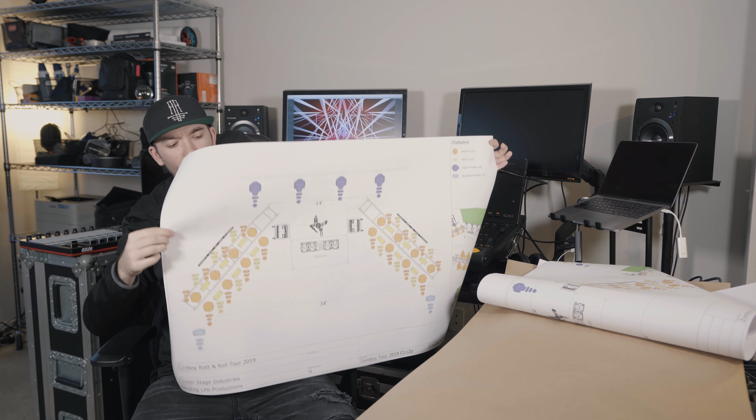Oh, almost forgot. The lamination thing is cool, but there's one other piece I'm forgetting, and that is the big plots. There are 3 of them, and they are top-down patch sheets of our show. Let me make sure I have it oriented correctly here.

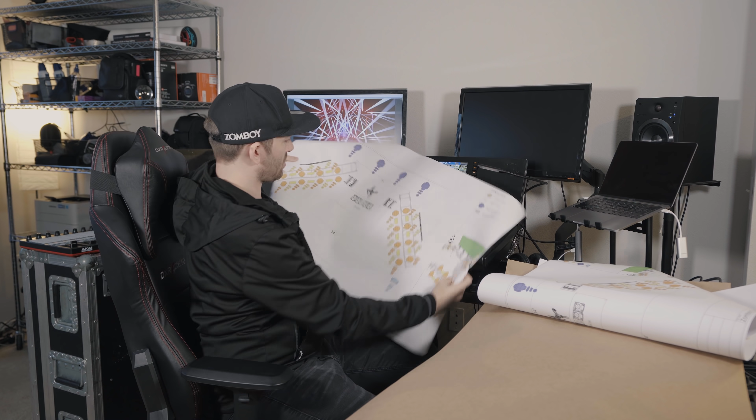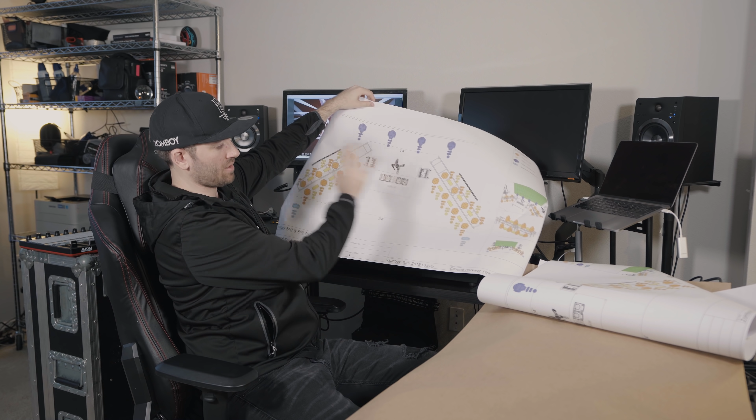There we go. So these are 24-inch tall by 36-inch wide 2D plots, and you'll see some 3D inset views. This is the main 2D part of the plot, top down, and we'll go over all of this on the computer. I'm just showing you the scale of things. In here we have our inset views, 3 of them, to give a 3D representation of what people are to expect when we come to their venue.

These are the big versions. Like I said, we've got 3 of these. The reason I have 3, and they're not laminated, is because we only really need 1, but we're going to be using 1 on our prep day. That is

this Sunday, at Pass Christian. By the time you see this, we'll already have used 1 of these for prep. Then we take all of them on the road, and I'll probably keep 2 in my work box in case we lose the main one—they're just really for backup. I don't laminate them because laminating the big plots makes it hard to handle. It's easier to just roll them up and keep them in a rubber band.

Other than that, this is the first time I've done laminated plots and patch sheets. So this is also the show that's on the screen back here. This plot is only for the ground package. But later in this video, I'm going to go over what this plot looks like for the stage I designed, and I'm going to be running the show in Tacoma coming up next weekend.

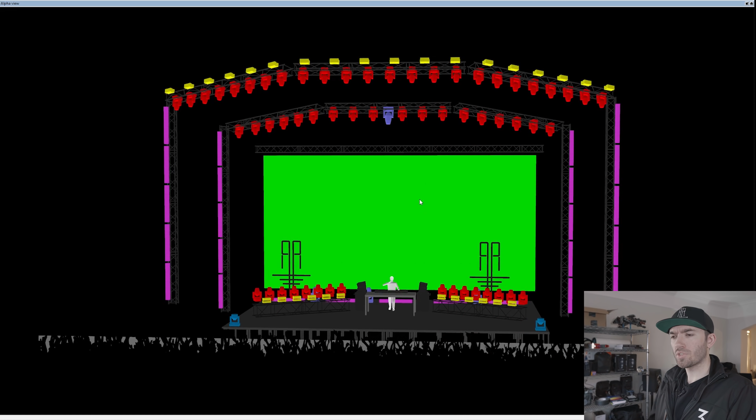So let's hop over to the computer and we'll take a closer look at one of these plots. We're going to pop over into Capture, that is the design software that I used for this particular show. And we can see I have a full screen visualization. It's not really a visualization, it's like a 3D model of what the stage looks like.

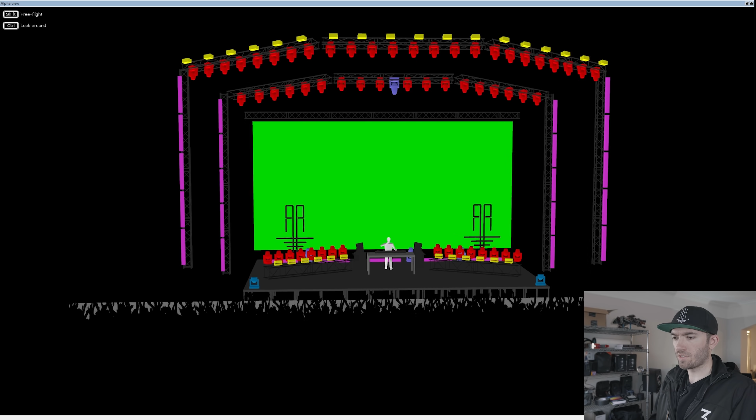We can make it a visualization by changing the view mode or view type. You can see all the beams of light and everything. But we're more concerned with this view right here because this is showing all the different elements and how they interact with each other in 3D space. You can see everything is layered, everything has its own separate little piece of the world that it exists in. But there are a couple problems with this.

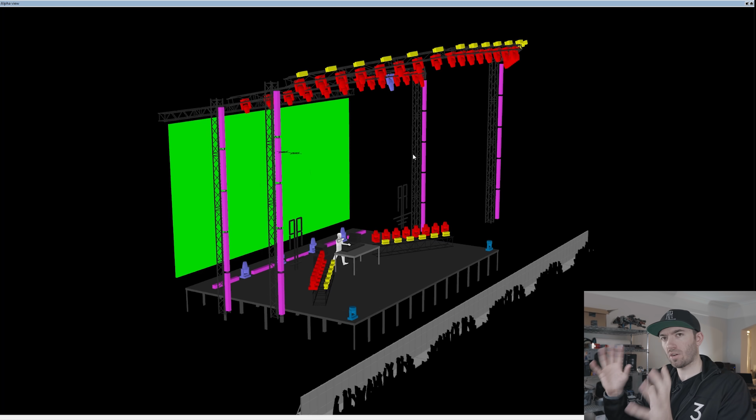Now, it would be nice if I could get everybody involved with the project to be on the same page with this 3D model. If they could just look at this 3D model and spin it around and see where everything lands, there would not be very many questions about what has to happen and what has to happen when.

Now, 3D models are great for certain purposes, like if you want to pre-visualize and do some pre-programming, or if you want to sell something to a client, they're really great for that. But 3D models are not the best for actually putting on a show and actually building a show.

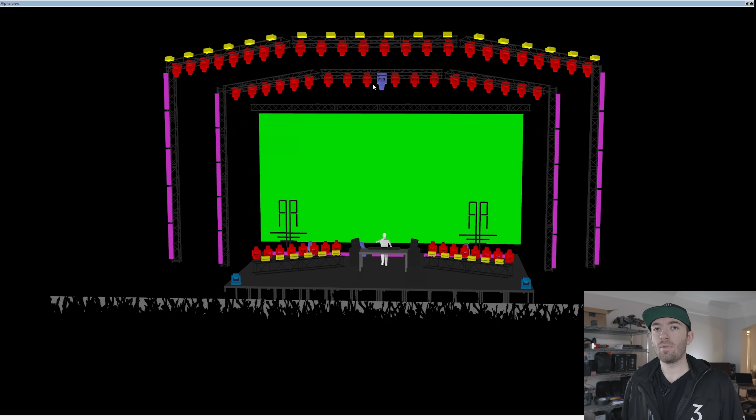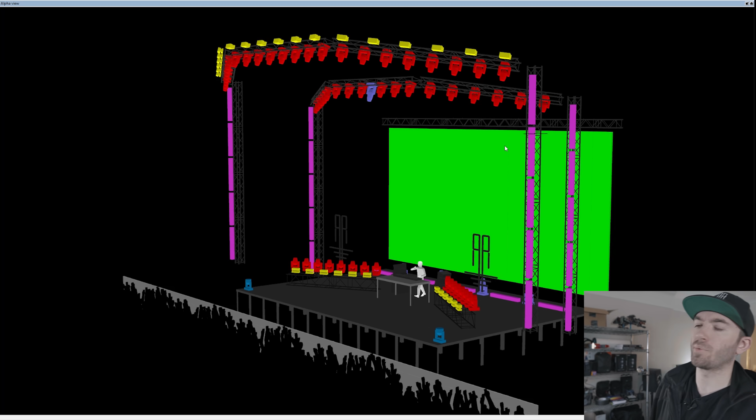There's a couple reasons for that. For one thing, 3D models, especially when they're in a perspective view, don't really give a good sense of relative scale between objects if they're different distances away from your camera viewing the stage. Secondly, not everyone helping to build your stage on the day of the show, usually stagehands, has a way of accessing this 3D model to fly around it and look at where everything is. So for those reasons alone, it's really beneficial to have top-down and front-facing 2D plots available for the build.

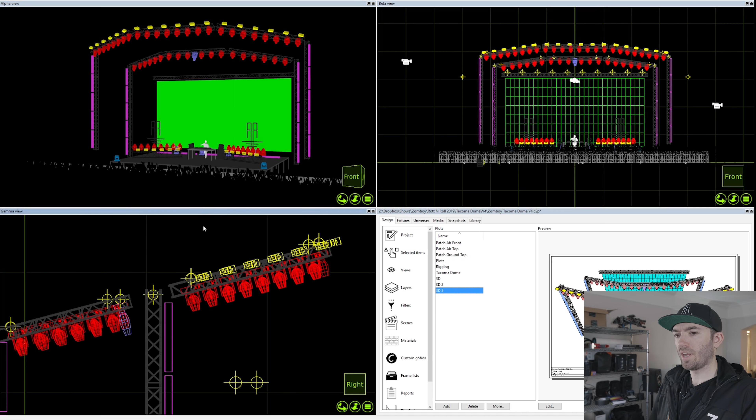And thankfully, Capture has a decent built-in plotting capability. So if I take one of my views here, we've got alpha, beta, and gamma, which we can change the view on. We can do all sorts of things, we can look at patch per-view.

I'm going to show you a little bit of usage with filters here. I'm going to enlarge this view, and this is kind of a top-down version of the entire stage with everything overlaid on it. In fact, you can even see the 2D crowd models that I have, as well as the barricade and things like the audio points.

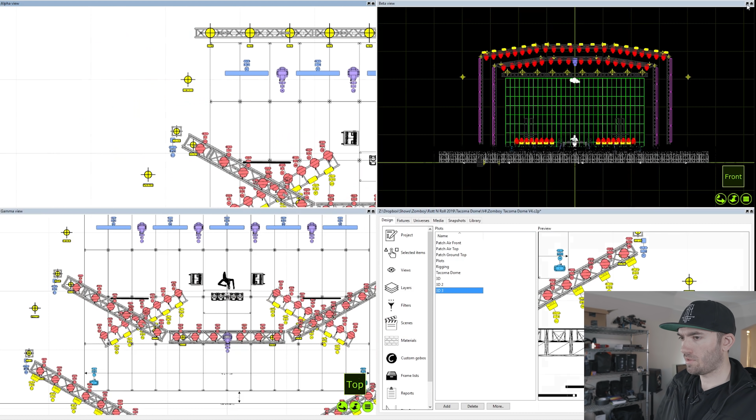We do have different filters that we can apply. So let's just go ahead and go over to our filters. If I drag this Kelsey filter on top of my alpha view, this is now showing only the objects that my good friend Kelsey is in charge of.

He is going to be... let me explain it this way. The tour rig is all the stuff on the ground, the stuff you saw on the plots when we were sitting over on the chair by the MA over there. Now, for this particular show, I had to redesign everything to look way bigger in the Tacoma Dome because it's just such a more massive space than the show is designed to fit in natively.

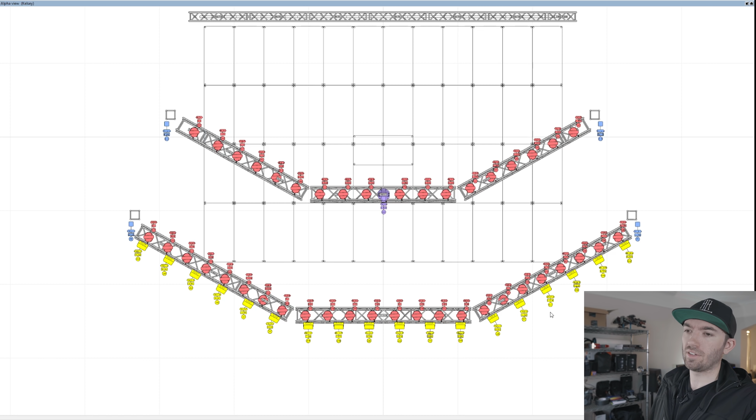So Christie Lites is also providing the same gear, but as an auxiliary package for this particular show. And that is what we're looking at here.

That's this view. Kelsey is in charge of making sure all of this works and gets in the air. And it even works in 3D too.

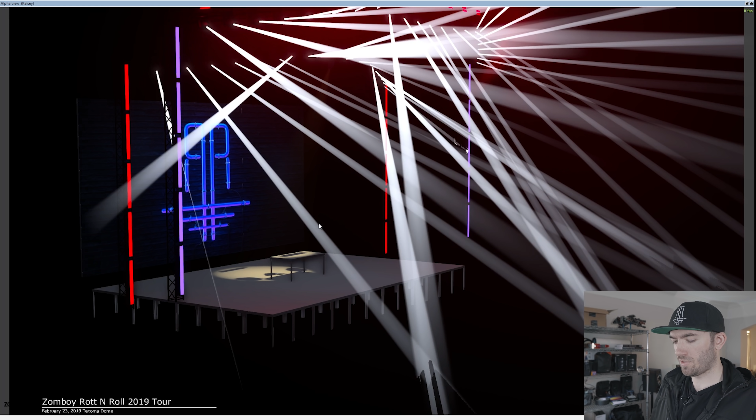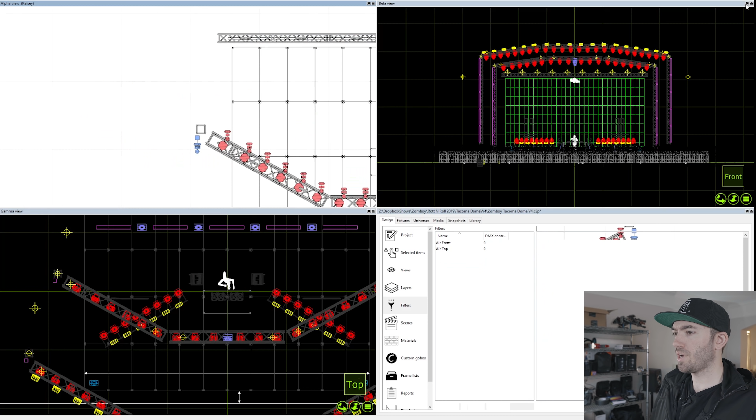All the filters apply to all types of views, including rendering views. I don't know how this would be useful really to just render, but I guess you can see where the Viper is pointing, which is kind of funny. Even if something is filtered out, it still casts a shadow. Because we don't have any CDJs here, just the table, and no monitors, and no Josh, but they're casting ghost shadows. That's pretty funny.

Okay, so we've got our different filtered views, but it's not really useful to show you this in Capture because you're not going to really have Capture if you show up on a show site. I do usually have my laptop set up and you can navigate around in it, but it's easier to just have a bunch of big, easy to read plots. And that is what we have under our plots tab here. You can see I've built about 8 or 9 different plots.

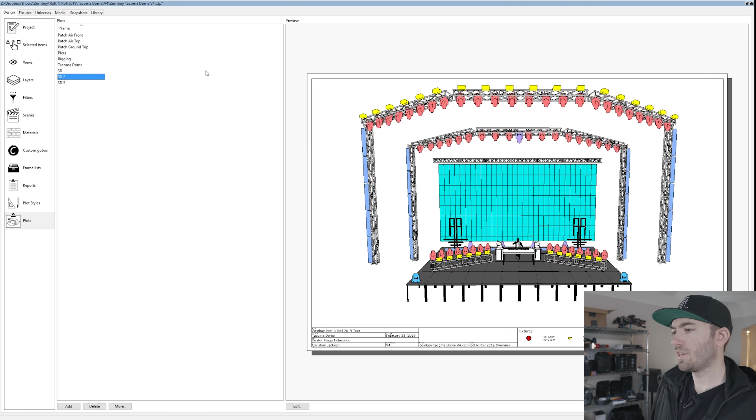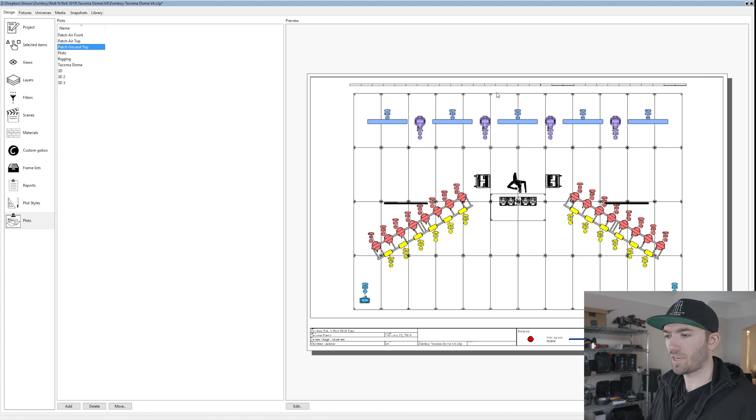These are all for different purposes, and given to different people for different reasons. This particular plot is called Patch Ground Top, which is pretty self-explanatory. This is all the fixtures that are going to be on the stage deck and where they are, what they're plugged into, what universe they're in, and what their address is. The only thing this does not show is the mode, curiously enough.

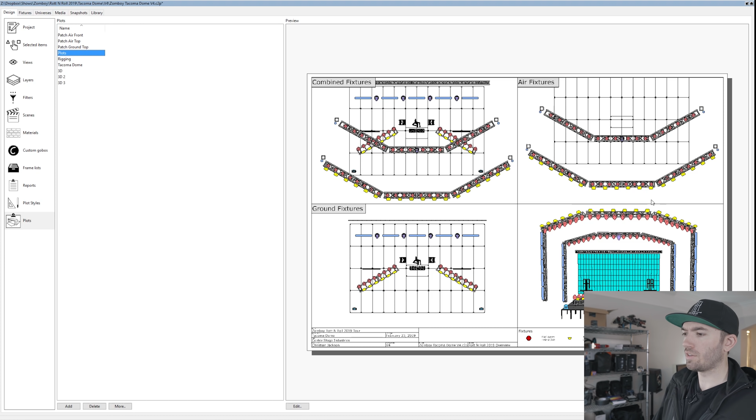Now that I've been on the receiving end of really bad, really low resolution, not very well printed plots, I've pretty much sworn to never do that to anybody else. So here you can see this is kind of what I'm able to give local people when I show up to do a show, in lieu of being able to give them a 3D model. This will hopefully give them a good perspective of the space the stage lives in, where everything goes, how many fixtures there are, and why we're doing the things that we're doing.

We also have a dedicated rigging plot. Now, I want to make a note that I'm not a rigger, I'm not rigging certified. I know the basics enough to pretty much be dangerous on a show site. This is purely an idea to get a sense of how many points we're going to need.

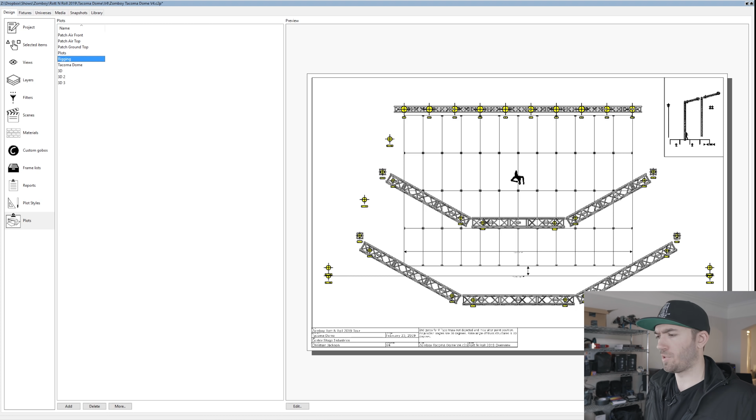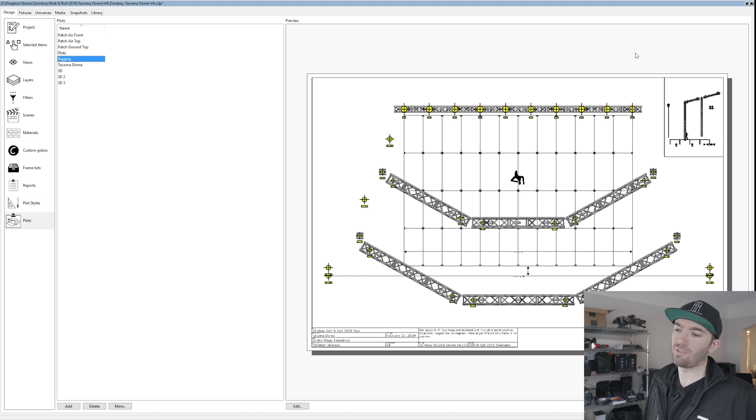So usually this is all sent off after the design is finalized, in this case to Matt Clemish of Precision Rigging. He's one of the companies in the same shop that I have my gear in, along with R90 and Positive Systems. I'll export a 3D CAD .dwg file, send it over to Matt, and he'll do all the load calculations. He'll account for how much cable weighs, things I can't really do in Capture, and make sure we can do the show safely with the right amount of gear. This, like I said, is more of a ballpark to see where things land.

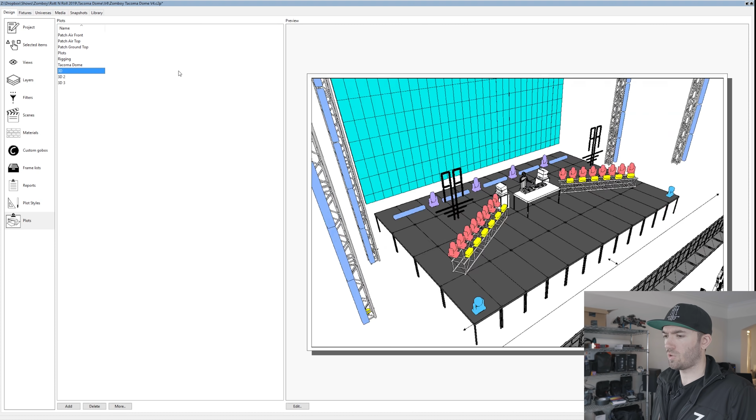And then these last couple views here are full-size 24 by 36, that size that's rolled up here. Those are large versions of the 3D plots. These are to show the people who pay for the show where everything is and what everything is doing, so it can get approved. So these are the ones I send to get approved, and then these other plots are the ones that actually have the data on them.

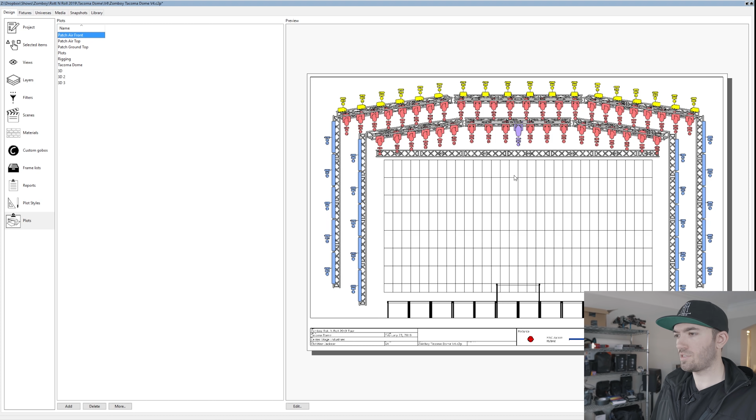So speaking of data, let's open up one of these plots and actually get down to it and see what data is actually included. If we take a quick look at our top-down air plot, which is showing all of the fixtures that are going to be hung in this F-type truss, most of that will actually be done in advance of the show. The only thing that's really going to happen on show site is these trusses will be linked together with pins, like spigots and pins.

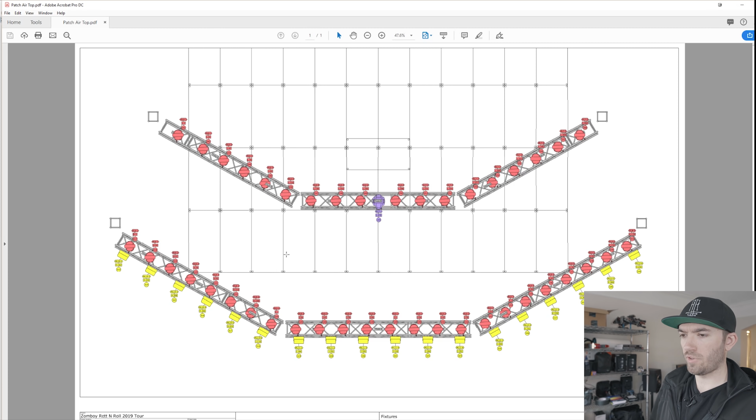They'll be angled, and then these JDC ones hanging off the front edge of the truss, the top chord, will be yoked out. So they'll probably be riding vertically, and then when they get on show site, we'll just pop them out. I think that's the plan right now. Kelsey's the guy who has the build plan on everything, but we will see.

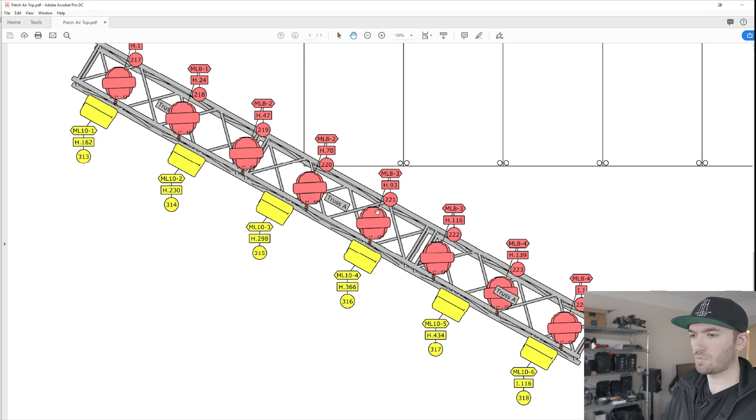So let's take a look at this segment right here. Drag a little bit over so we can see better. You can see we have two different types of instruments here. One of them is a JDC1, and one of them is a MAC Axiom Hybrid. The red one is the Axiom, the yellow one is the JDC1.

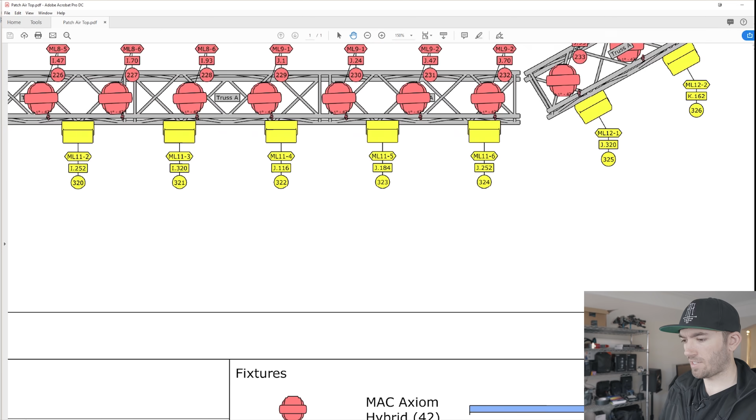Now, if you didn't know that, say you've never worked on a show before and don't know the difference between the two, we have a little key down here that is both by color and shape. So you can see MAC Axiom Hybrid and JDC1 strobe. We also have a little bit of labeling on the truss elements as well.

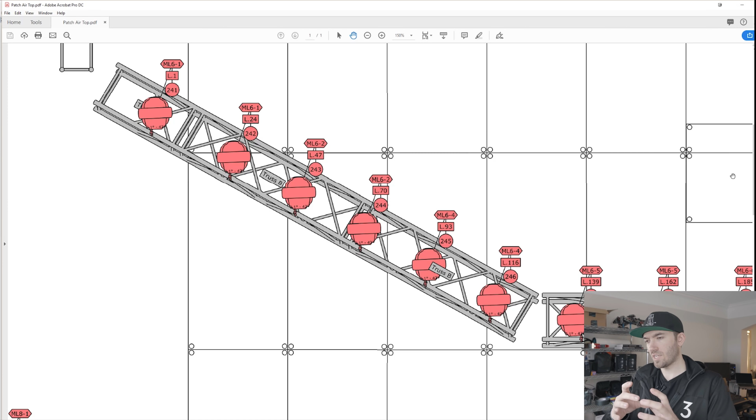All of these individual pieces or segments of truss are labeled as truss A. So truss A is populated on all of the pieces of truss throughout the top view. So that's truss A, and that is truss B. I do this by continuity, so any truss that is physically connected to another piece of truss all gets the same letter, and then different segments or structures of truss get different letters.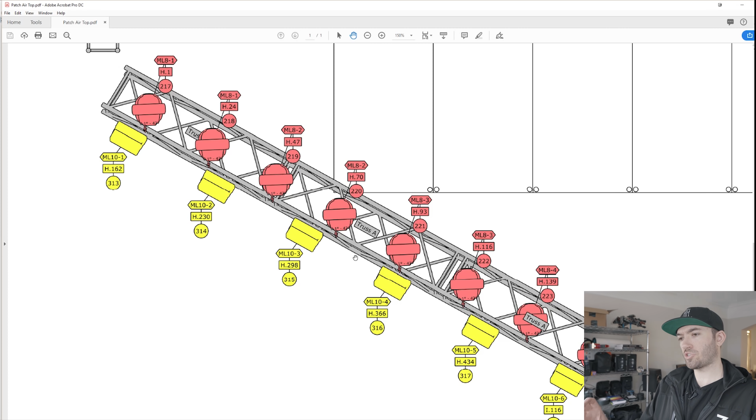Right now we only have two on this show, and this is useful because on these patch sheets—let's see if I have one right here—labeling location is super important. On the patch sheets that we're using to build this show, there's a cell next to everything else that's just as important, like the circuit, the universe, and the address. There's also a location cell. So the location will say truss A, truss B, upstage ground, midstage center, and that makes sure the right address and the right light are being placed in the right location. So that refers to these location markers, truss A.

Let's take a little bit of a closer look at this JDC1, for example. So you can see we've got a bunch of letters and numbers here that if you're just glancing at it, you might be a little bit confused by, and that's okay. So we're going to go through it here.

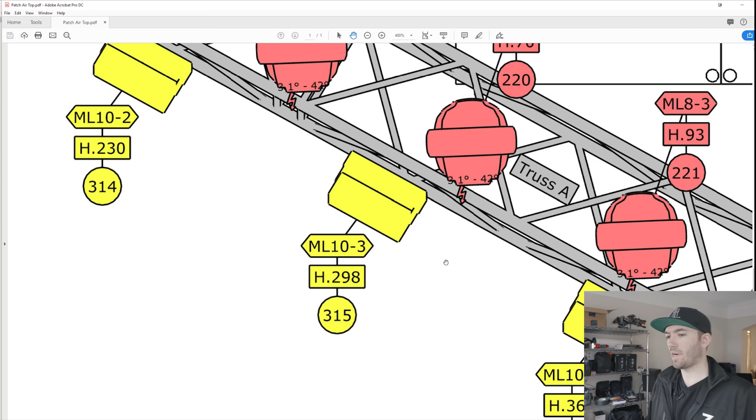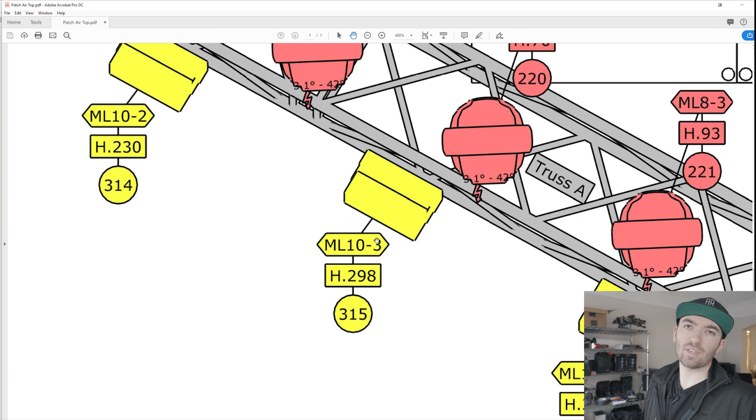Anytime you see ML or anything like that, you're going to be talking about power or moving light power. This is kind of a throwback to when there were a lot more conventional rigs than moving light rigs, whereas now it's pretty much flip-flop. Now you have more moving light and 208 volt powered rigs than you have 120 volt dim rigs. And that's where this comes in. So ML refers to the type of voltage of the breakout in this case, the breakout being the place where the multi-pin cable lands on the truss and breaks out to the different instruments.

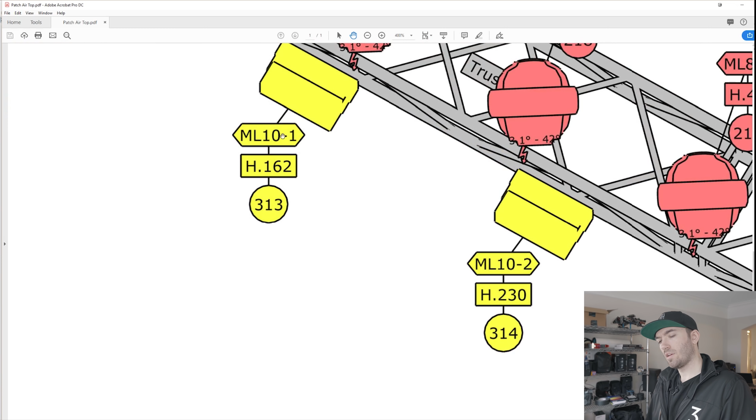So this is ML 10-3. So what does that mean? That means it is the 10th moving light breakout, and it is the third circuit on that breakout. So you can see we've got its neighbors here, ML 10-1, 10-2, 10-3, 10-4, 10-5, 10-6, all the way down here. So these 6 JDC1s are splitting up their power along one breakout that has 6 circuits on it.

So that's pretty convenient. Wow, it's like I almost thought of that when I put this together. So these 6 JDCs are solo because they take too much power if they are ganged together, so we cannot twofer them. They each have their own individual circuit.

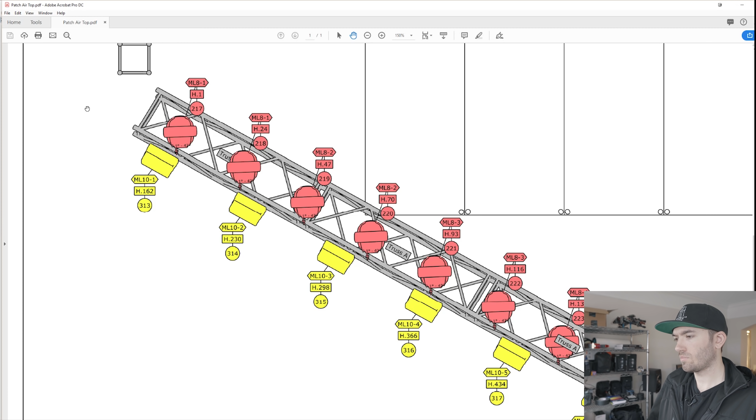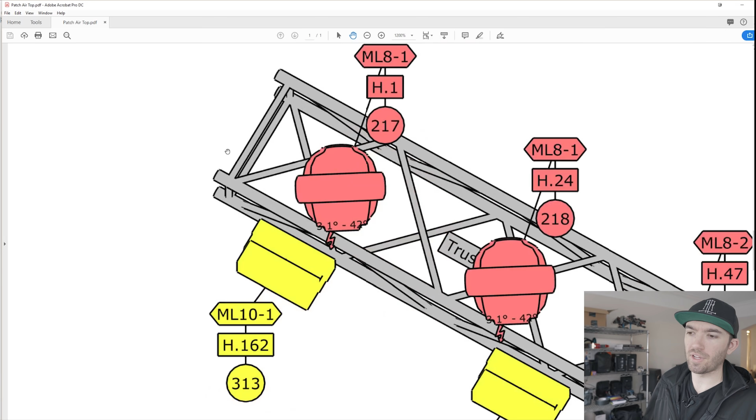So on a more advanced plot—and this is more just a prep plot—the breakout will be marked somewhere around here. The breakout is going to live somewhere around here and then splay outwards, and then connect to these instruments as needed. Let's look at a couple other things on this instrument.

H.298. This is one of my more major annoyances with Capture and the default way that they indicate universes. Universes are labeled by letter first, then a decimal, then the start address of the fixture. The start address is the first address of the fixture. That's the one you see in the menu when it pops up on the screen when you go to change the address, or if you're flipping dip switches—that is the start address of that fixture and where it lives in a DMX universe.

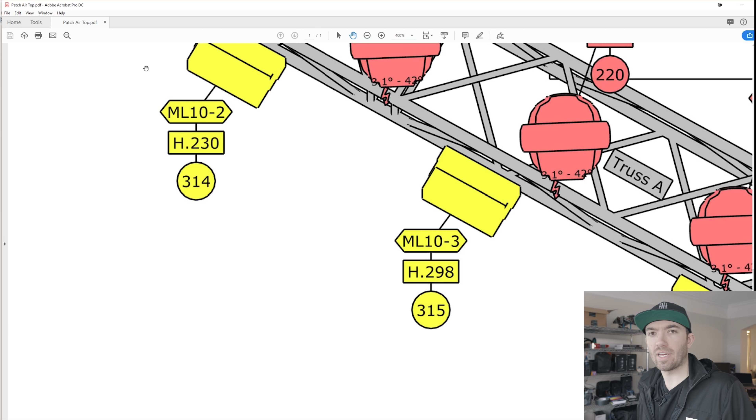These particular fixtures have 62 channels in the mode I'm set up for. So while the start address is at 298, it's actually occupying 298 and another 61 channels after that. So that whole section is reserved for this one fixture's control. And then this last number in the circle here is the unit number. Those are just sequential by 1, starting with the first fixture in a series.

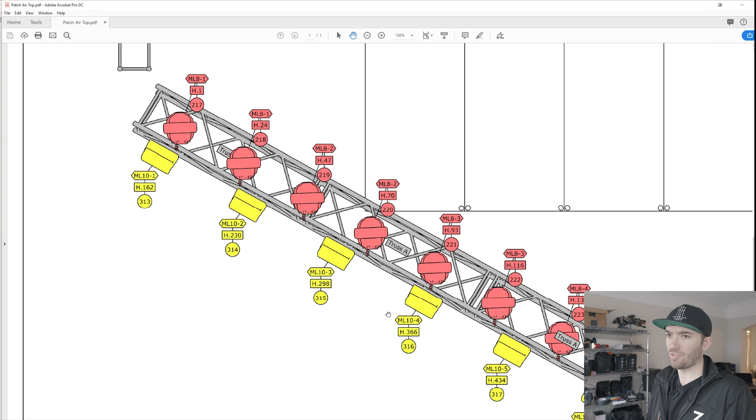Now that might sound a little confusing, but let me pop over into the combined plot.

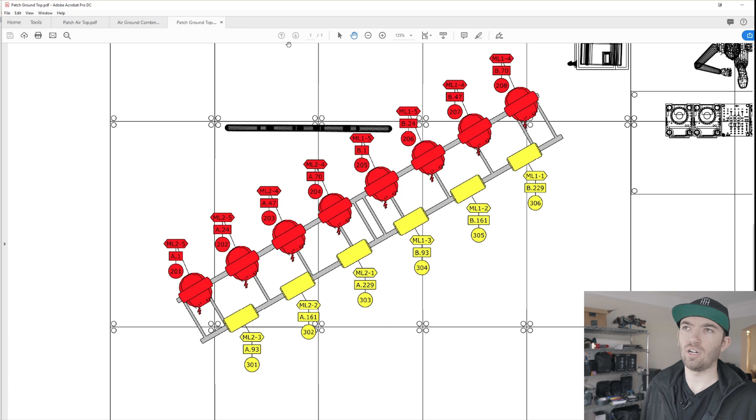So what I mean by the first in a series, or first in hundred series, is each fixture type, sometimes fixture location, also gets granulated down a little further, but every fixture type starts with a hundreds series. So if I were just to import all my fixtures into a file, everyone would have an individual ID number, right? If we have 120 fixtures, it would just be 1 through 120. But I make it easier to understand which fixtures are where, both on the plot and in my mind, on the MA. Everything is easier if you start with the hundreds digit.

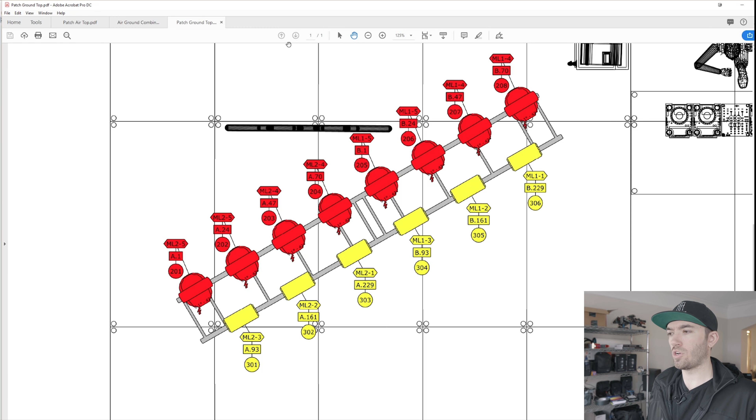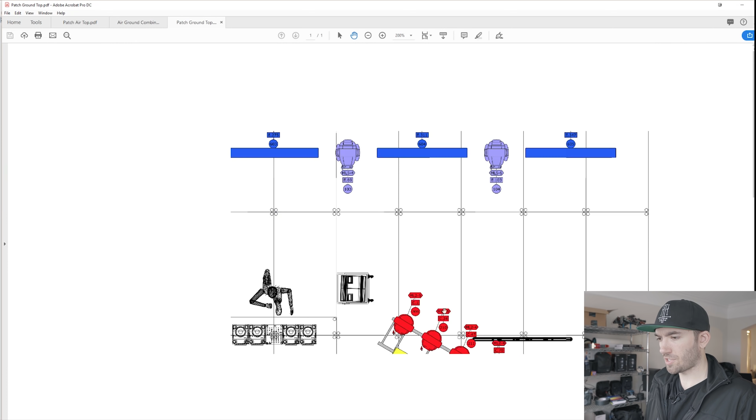So fixture 101 is the first spot fixture on the rig. And lo and behold, here we have fixture 101, followed by 102, 103, 104. So if we added more fixtures, the next one, no matter where, would be 105. And that is the case with this patch in the air. We have on truss B, another spot fixture, fixture 105.

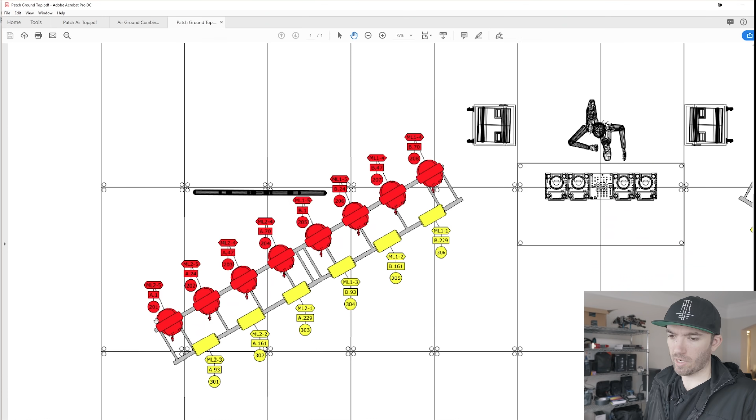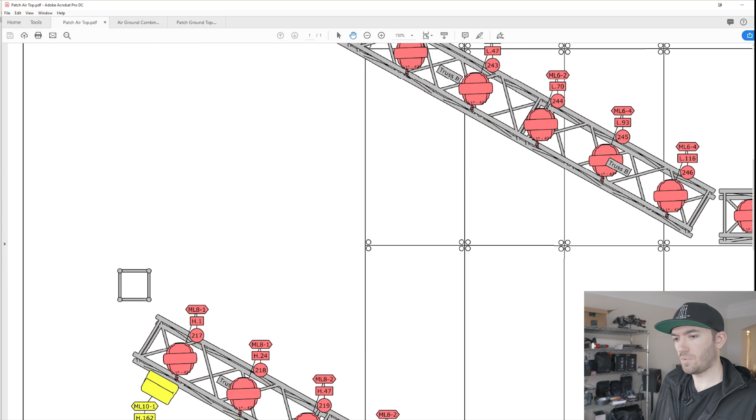It's the same thing with the axioms. Those I consider my beam fixtures, even though they're hybrids and can do both jobs pretty well. I start them off in the 200s, so this is 201, 202, 203, all the way to 208. We jump the truss, and then start at 209, 210, all the way to 216. Then we continue in the air. So if 216 was our last on the ground, we should have, and there it is, 217, 218, 219, all the way across. And then the JDCs skip over to the 300 series, so on and so forth.

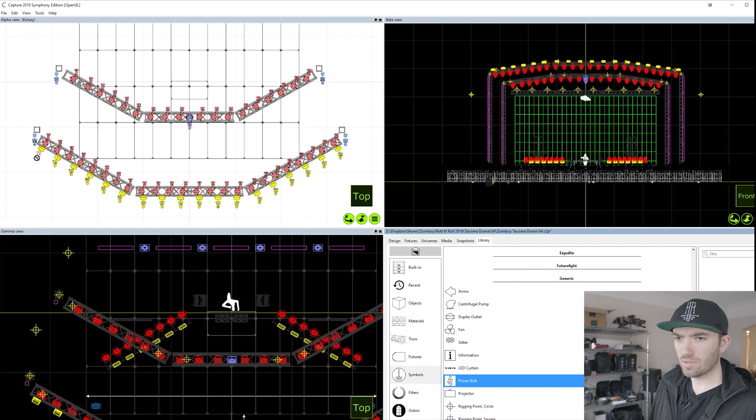So if I wanted to add a symbol for a breakout, I can go over into my generic folder in my symbols, and put, let's say, a power bolt here. Let's just make that symbol for the breakout. You can see it's invisible now because in this view I have Kelsey's profile or filter applied.

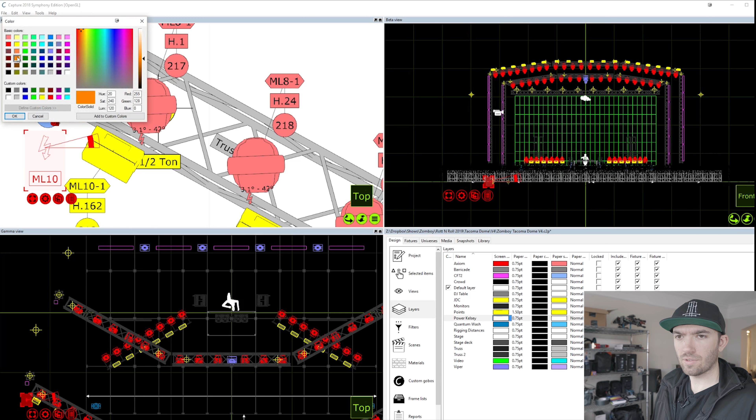So now I can call this ML10, and it is now labeled as ML10, and I can increase the scale of that bolt. I can add a layer and call this Power Kelsey. We can make it a different color so it's easy to identify. Call it orange, and the paper color will also be orange, and we have to remember to drag it onto our paper.

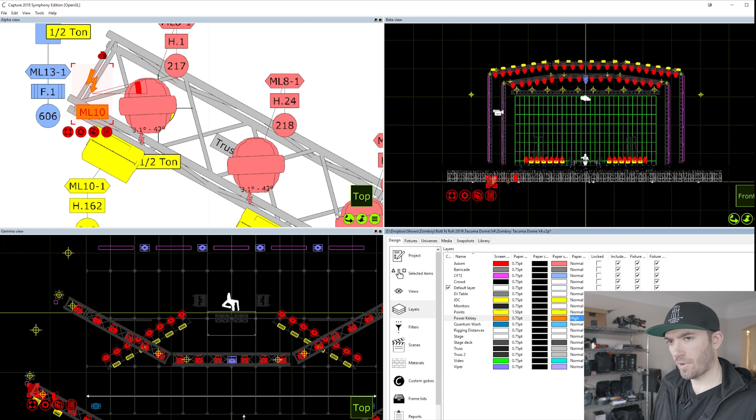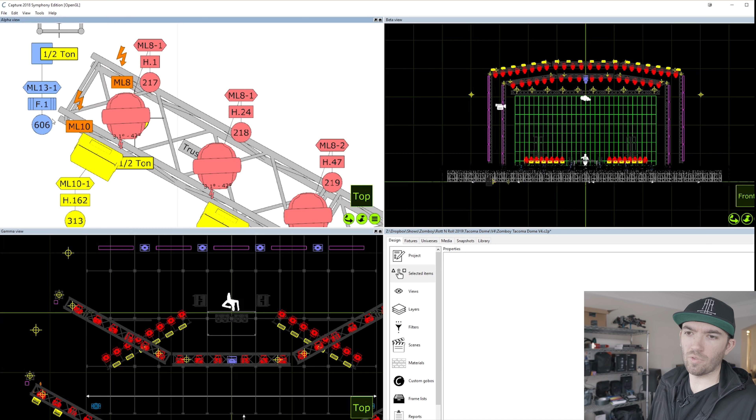So now we can see how it's behind the truss right now. If we want it to have a higher priority, all we do is change the paper priority to high. And now we can see that ML10 breaks out here. And we could even go one step further. We see we have ML8 right next door. We can copy this by dragging the copy symbol, hit enter, and then change the label to ML8. So now we have both ML8 and ML10 breaking out on this truss, and it's easy to see that.

And now if we re-export our patches, re-export our plots, that'll show up on the plots. So it is important to have an easy to read plot, especially when you're going into a different venue that may have different specifications, different widths of the stage every night. So when we're going out on tour, we show up in the morning, meet a new crew, give them all this information, and build the stage. It's important to have easy to read information and have everybody on the same page, and that's what these plots do.

Now, in all fairness, this particular show is not overly complex as far as space constraints or having to have a lot of departments work together. It's really just lighting, stage deck provided by the venue, and LED screen. It all fits within the same plot and is easy to look at all at the same time. But if you have different levels of a convention center with similar floor plots, or different types of vendors entirely, like catering that needs to know where tables are placed, your lighting plot doesn't need those tables on it. So it's important to keep those things in mind when generating plots for your shows.

Anyways, I hope you guys enjoyed this quick glimpse into how to read and look at a plot, and draw a basic plot as well. I'm not an experienced plot drawer or anything like that. I just wanted to share this particular show that I designed, and hope you found some useful information out of this video.